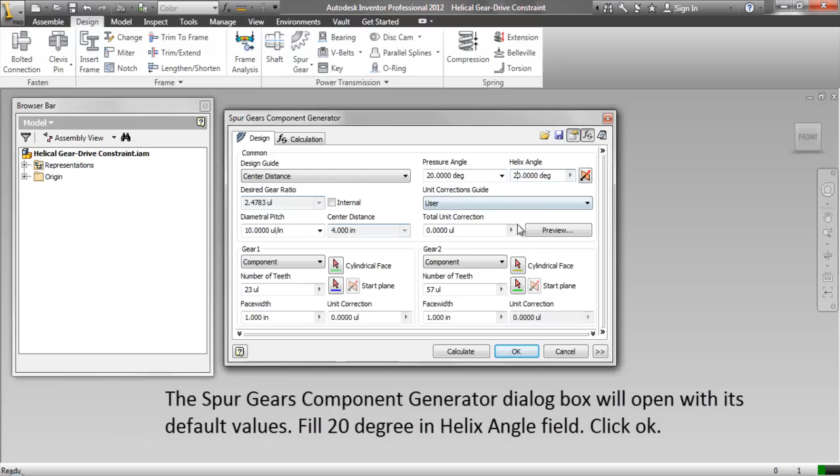Hold the Control key and click the spur gear tool on the power transmission panel of the design tab. The spur gear component generator dialog box will open with its default values. Fill 20 degree in helix angle field. Click OK.

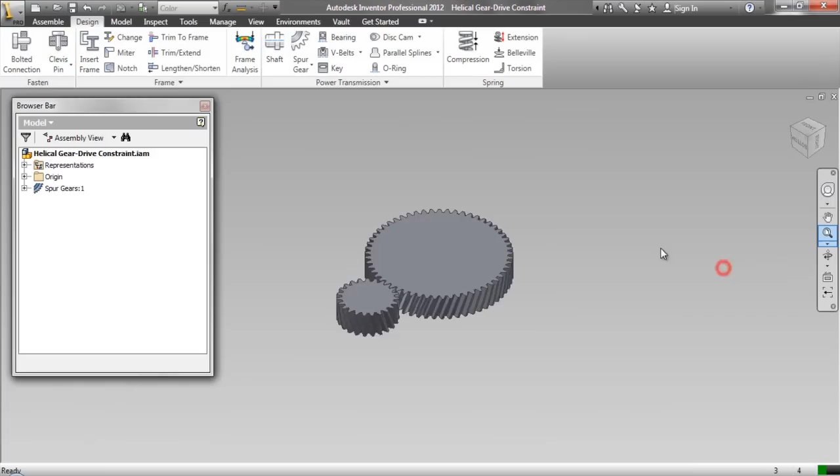Click anywhere in the design window to place the spur gear 1 and spur gear 2. Align the model in correct position by using View Cube. Make the spur gear assembly flexible from the browser bar.

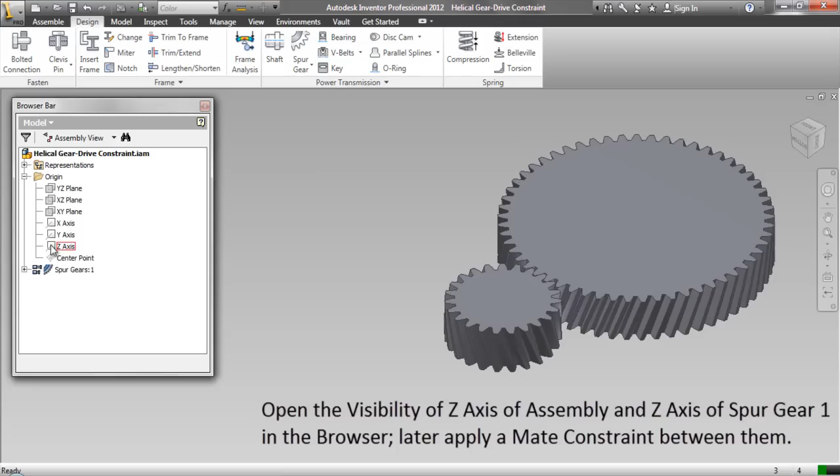Open the visibility of Z-axis of assembly and Z-axis of spur gear 1 in the browser. Later, apply a mate constraint between them.

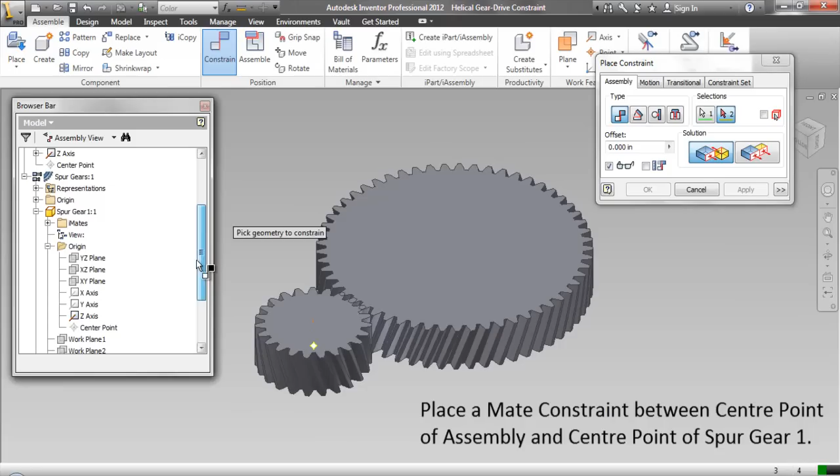Place a mate constraint between center point of assembly and center point of spur gear 1. Open the visibility of YZ plane of assembly and Z-axis of spur gear 2. Later, apply a mate constraint between them.

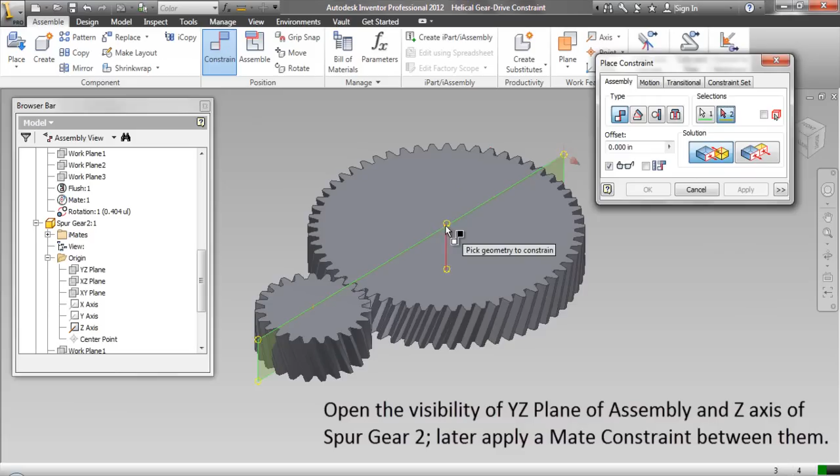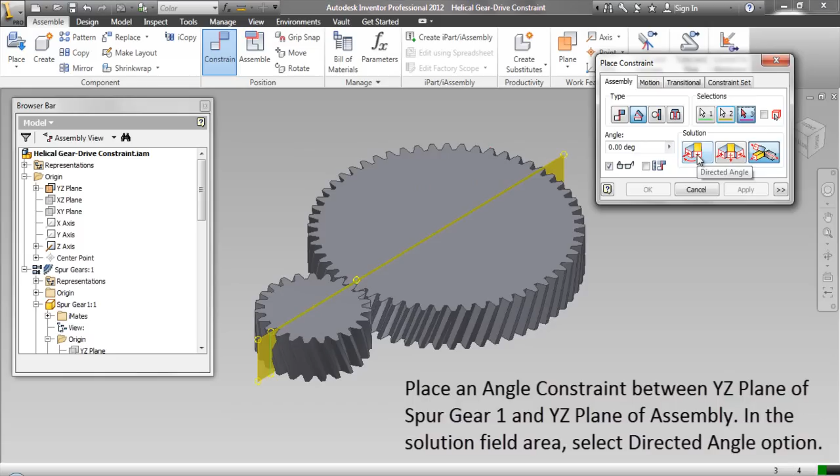Place an angle constraint between YZ plane of the spur gear 1 and YZ plane of assembly. In the solution field area, select directed angle option. Turn off the visibility of work plane to make the screen clear.

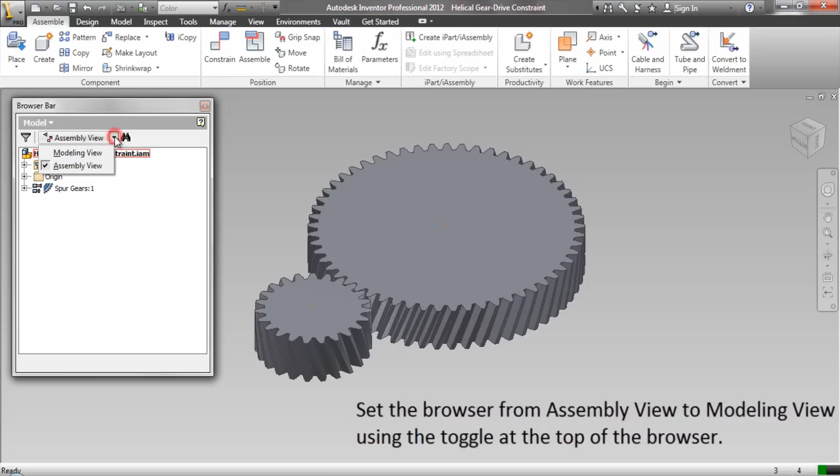Set the browser from assembly view to modeling view using the toggle at the top of the browser. Select the angle constraint in the browser and change its name as drive by clicking twice slowly. Right-click the drive constraint and select Drive Constraint tool from the context menu.

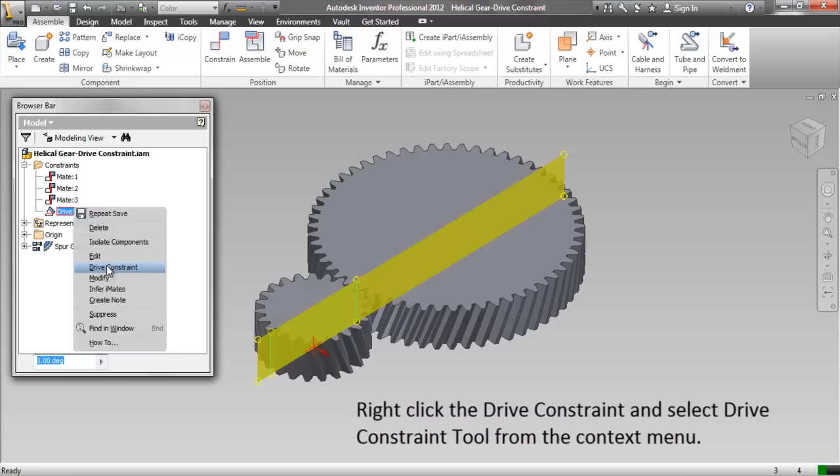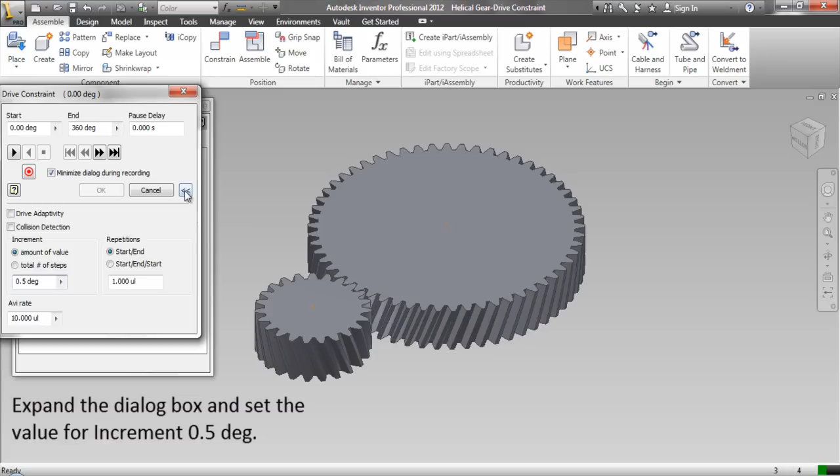In the Drive Constraint dialog box, set the end value to 360 degree. Expand the dialog box and set the value for increment 0.5 degree. Clear the screen by activating the clean screen command. Click the forward button to display motion in Spur Gear 1 and Spur Gear 2.